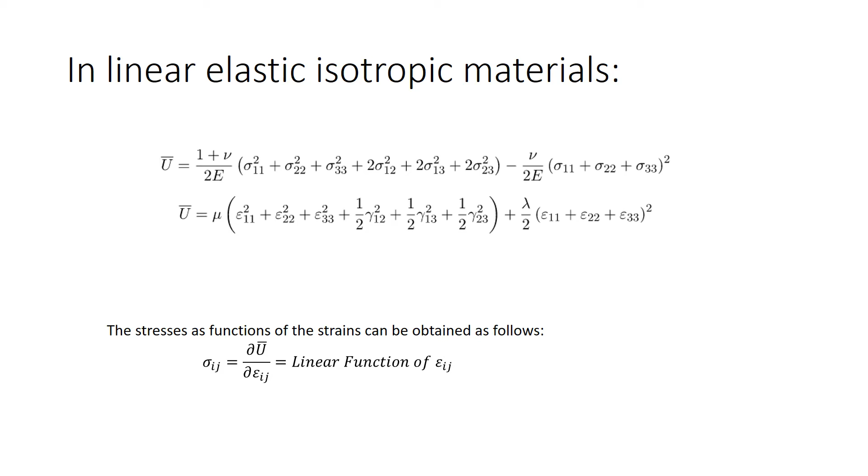I'm going to digress for a moment to talk about path dependence and path independence. In general, if I have a well-defined smooth function, let's say from R squared to R, let's call it u, then the infinitesimal change in u, du, is equal to partial u by partial x multiplied by the infinitesimal dx plus partial u by partial y multiplied by dy.

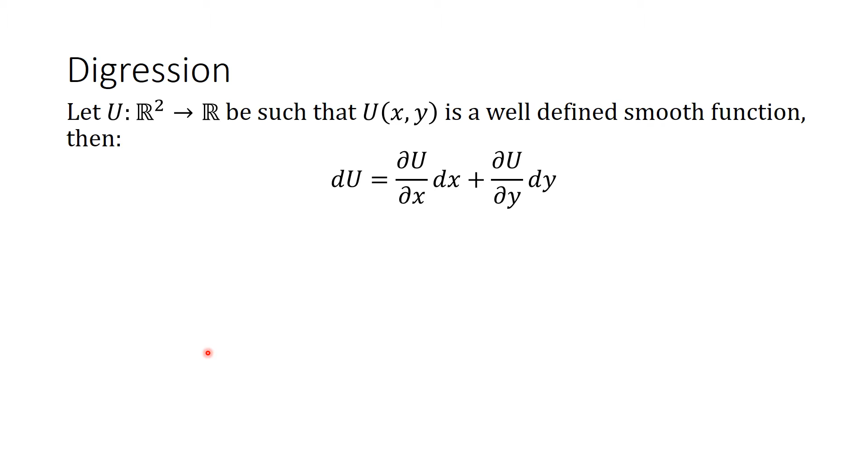The integration over du from point 1, characterized by the values x1, y1, and u1, to point 2, characterized by x2, y2, and u2, is basically equal to u2 minus u1. This is equal to the integration of two terms, partial u by partial x integrated over x and partial u by partial y integrated over y. Since u2 minus u1 is constant, this integration is independent of the path between x1, y1 and x2, y2.

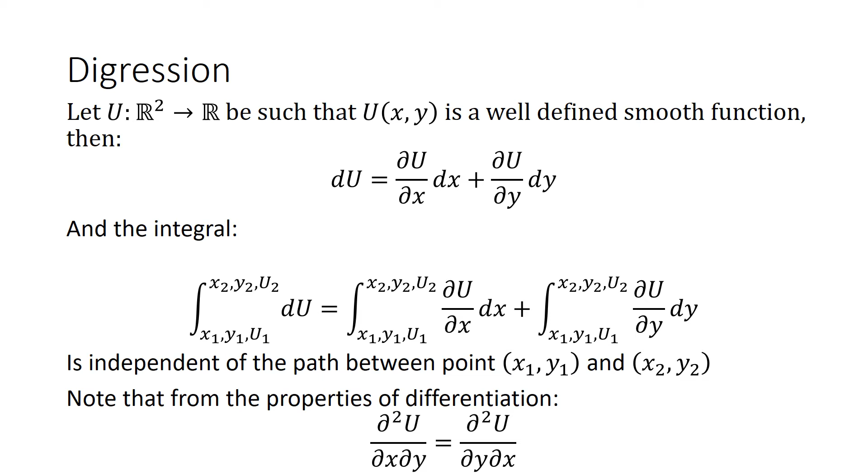And from the properties of differentiation, the second derivative of u with respect to x and y is equal to the second derivative of u with respect to y and x. If we have the differential form, du is equal to a function a of x and y multiplied by dx plus a function b of x and y multiplied by dy, then we have two possible scenarios.

The first scenario is that the expression is called an exact differential, and the integration over du is path independent. That's true if and only if partial a by partial y is equal to partial b by partial x. In that case, there is an explicit form for u that is a function of x and y.

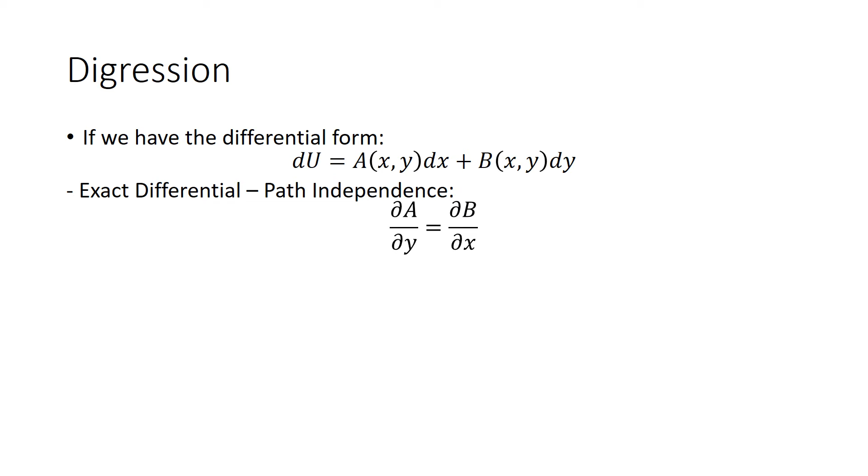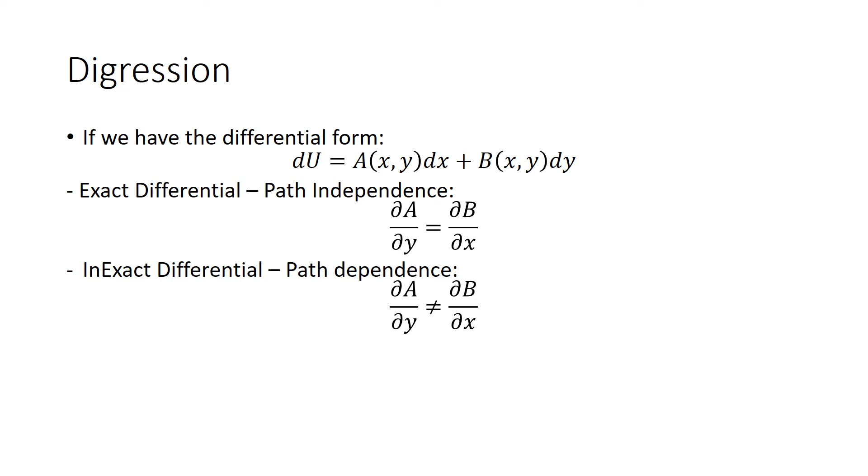The second case, if we have an inexact differential, the integration is not necessarily path independent, and that happens when partial a by partial y is not equal to partial b by partial x. There is an example in the online notes where the energy is not preserved if the relationship between the stress and the strain is not symmetric, where we do not have an exact differential.

So what does this mean exactly? Here we show a schematic representing what we presented in the previous slides. The blue surface represents u as a smooth function of the variables x and y. The value of u2 minus u1 is constant and is equal to the integral along any path between 1 and 2. We've got a green path here and a red path here.

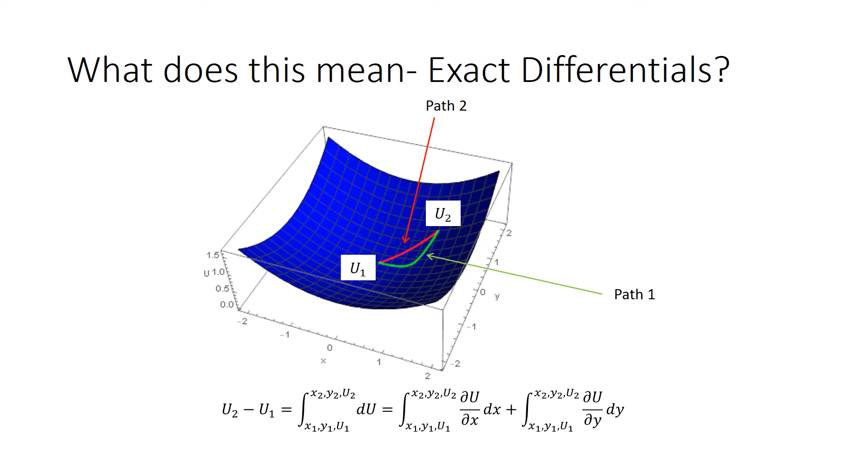So what does this mean in terms of mechanics? Let's see this example. We have an elastic material that does not dissipate any energy during deformation. Let's assume two states of deformation. State 1 with mechanical strain energy density or energy content U1, and state 2 with mechanical strain energy density U2.

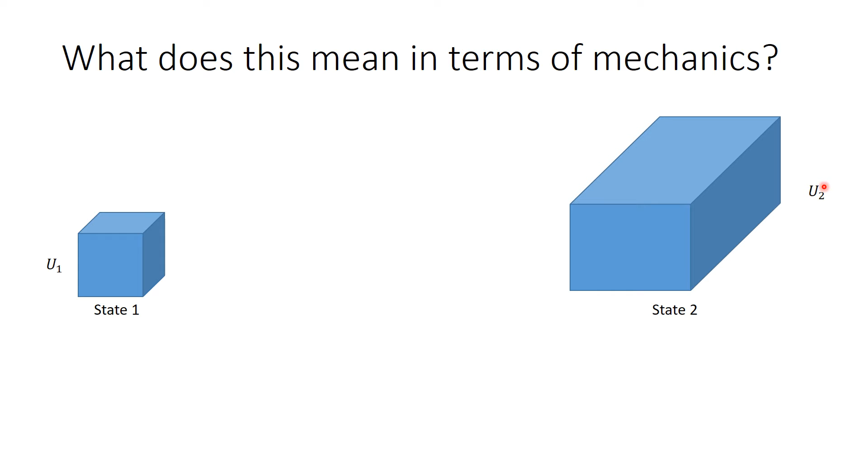We can move from state 1 to state 2 using a particular path. Path 1, in which we choose to apply deformation on one side first and then apply deformation on the other side. Or we can go from state 1 to state 2 using a different path.

Path independence guarantees that the energy U2 minus the energy U1 is the same whether we go through path 1 or path 2. So the energy is independent of the path of deformation.

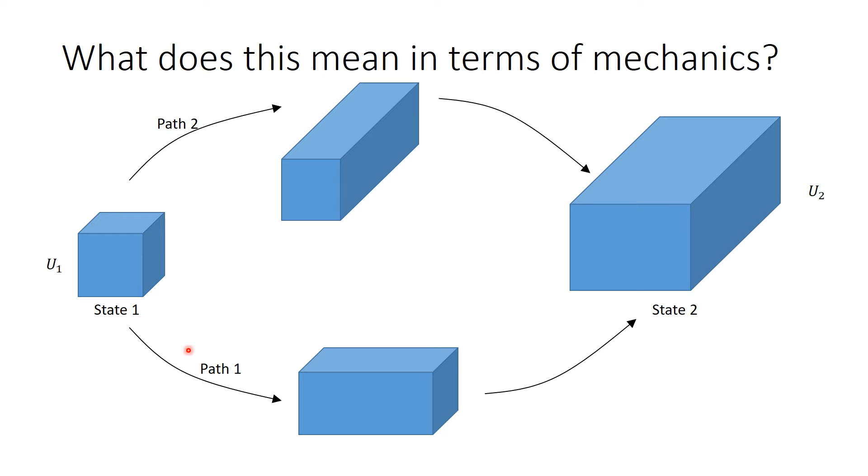So if I have the differential du equal to a dx plus b dy, for u to be independent of the path, a has to be equal to partial u by partial x, and b has to be equal to partial u by partial y.

When I apply this to mechanics, if the increment in the internal energy is equal to each component of the stress multiplied by the component of the strain, for example, sigma 11 delta epsilon 11 plus sigma 22 delta epsilon 22 and so on, then for the energy to be neither created nor dissipated, or to be independent of the path, the energy has to be a well-defined function of the strains, and each component of the stresses has to be equal to the derivative of the energy function with respect to the corresponding strain component.

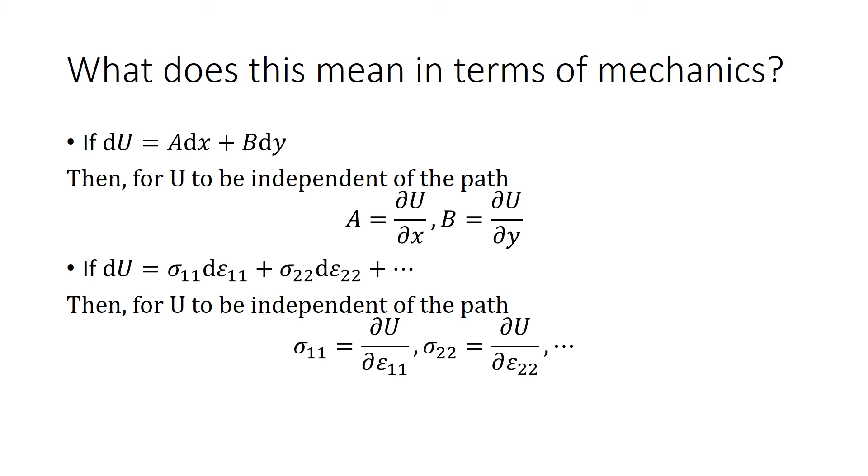In section 9.2.1, we showed that the increment in the strain energy per unit volume in the deformed configuration is equal to the sum over all the components of sigma ij multiplied by the corresponding change in the strain component delta epsilon ij.

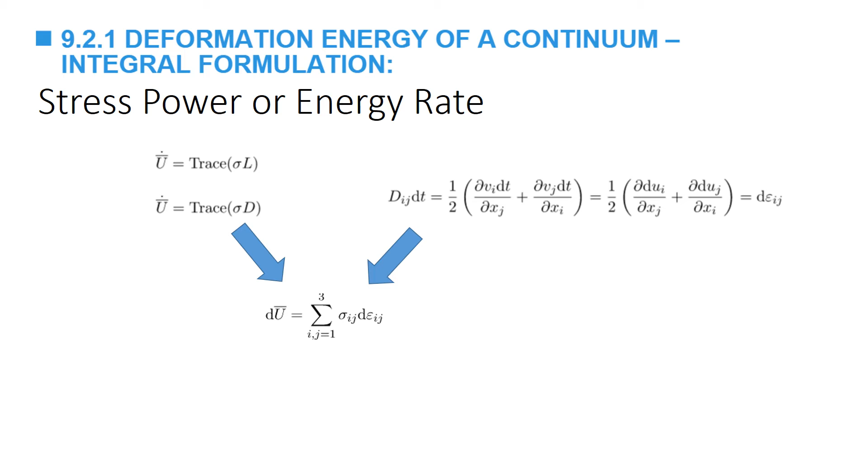We also showed that the increment in the strain energy per unit volume in the reference configuration is equal to the sum over all components of the first Piola-Kirchhoff stress tensor multiplied by the corresponding increment in the deformation gradient Fij. On a side note, remember that the increment dF of the deformation gradient is also equal to the increment in the displacement gradient, which might come in handy in some applications.

So, to describe the material as elastic and the energy to be independent of the path, the components of the first Piola-Kirchhoff stress tensor are equal to the derivative of the function W with respect to the components of the deformation gradient. dW is equal to Pij multiplied by dFij, and Pij's are equal to partial W by partial Fij.

So hyperelastic materials are materials whose constitutive law is described by a strain energy potential function W, and W can be given as a function of the deformation gradient F. In the next few slides, we will investigate the possible forms for such energy function to ensure isotropy and independence of the coordinate system chosen.

First, let's consider the independence on the chosen coordinate system. We will term this independence frame invariance. Given a deformation described by the deformation gradient F, so this is the original or the reference configuration, and this is the deformed configuration, they are related by the deformation gradient F, the strain energy per unit reference configuration is equal to W as a function of F.

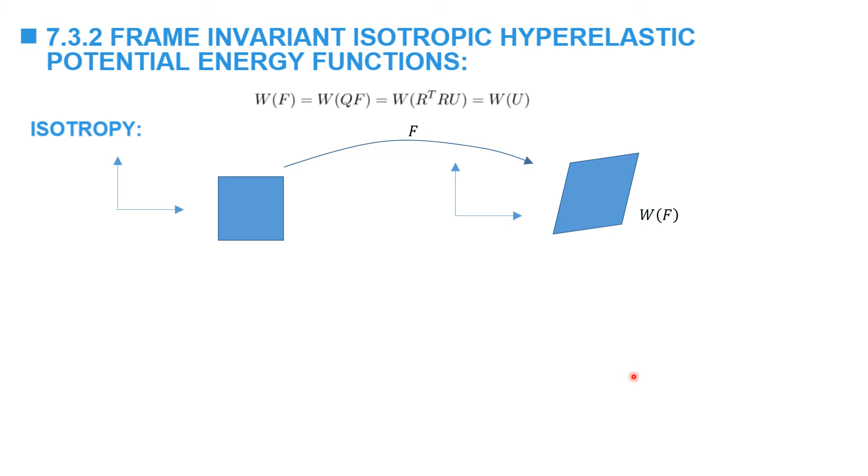It means given a reference configuration, I can apply a deformation gradient F and get a deformation, and the energy is a function of F. If I choose to do a rotation and then apply the same F, then the energy is equal to W of FQ. The reason F and Q are in this order is because I apply Q first on the vectors and then I apply F. And so W is equal to a function of FQ.

You can think of this as rotating the object by Q and then deforming the object by F. If the material is isotropic, then the final energy should be the same whether it's W of F or W of FQ. This leads to the following mathematical statement. For every Q, where Q is a rotation matrix, W of F is equal to W of FQ.

Now recall that F can be written as P multiplied by a diagonal matrix multiplied by Q transpose, where D, the diagonal matrix, has diagonal components lambda 1, lambda 2, lambda 3, which are the principal stretches, or the positive square roots of the eigenvalues of F transpose F. And so this tells me that if I have an isotropic frame invariant hyperelastic material, I can simply write the strain energy as a function of these three numbers.

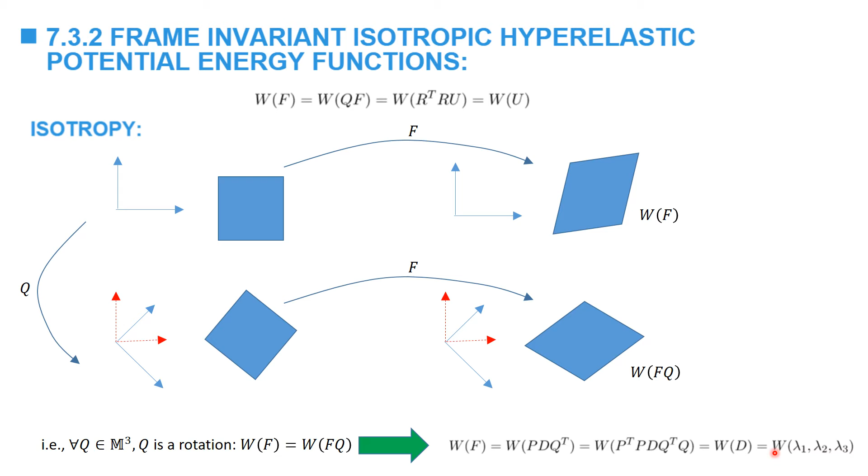It turns out that for any isotropic hyperelastic material, you can write W as a function of the following sets of components: the principal stretches lambda 1, lambda 2, lambda 3; the squares lambda 1 squared, lambda 2 squared, lambda 3 squared; the first, second, and third invariants of U; or the first invariant of U squared, the second invariant of U squared, and J, which is the determinant of F. All these are equivalent, and the proof of this is online.

You can also choose to write the energy as two functions: one with no volume change, and another one associated with volume change. The one that's associated with volume change is a function of the determinant of F, J, while the other term is a function of I1 bar and I2 bar.

I1 bar and I2 bar are the first and second invariants of F bar transpose F bar, and F bar is equal to F after dividing by the cubic root of the determinant of F, and that guarantees the determinant of F bar is equal to 1. So basically normalizing F according to the volume change.

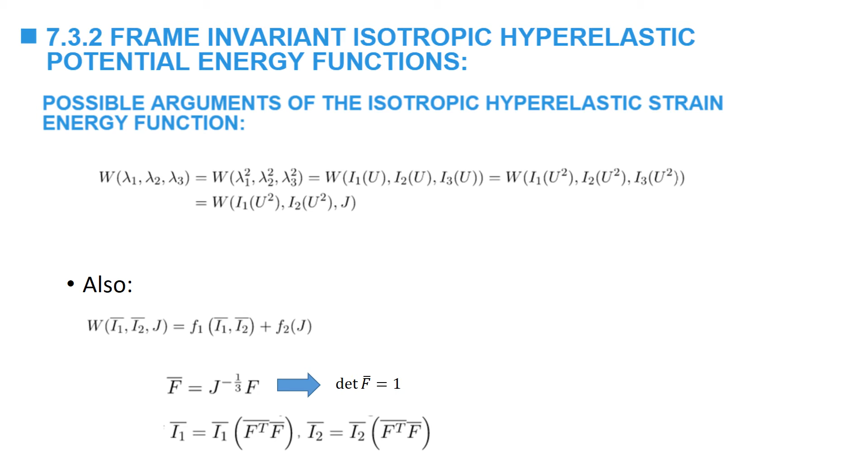Whatever form is chosen, it should in most cases abide by the following. The minimum energy should be attained when the deformation gradient is equal to the identity matrix or to a rotation. The energy should also increase to infinity when the determinant of F is going close to 0 or the determinant of F is going to infinity.

If I bring a material and I squish it, the deformation energy has to increase, and if I expand it infinitely, the energy has to increase as well. Similarly, the energy should increase to infinity when the stretches increase to infinity.

The first form that we are going to present is the form where the energy is written in terms of the first two invariants of C, namely I1 and I2: the first invariant of U squared, which is F transpose F, and the second invariant of U squared, which is the second invariant of F transpose F. J is the determinant of F.

The first Piola-Kirchhoff stress tensor is partial W by partial F. Now I've written W as a function of I1, I2, and J, and so to find partial W by partial F, I need to take the derivative of W with respect to its variables I1, I2, and J, and then multiply by the derivative of these variables with respect to F. So there's a lot of work that we need to do a priori to find these derivatives.

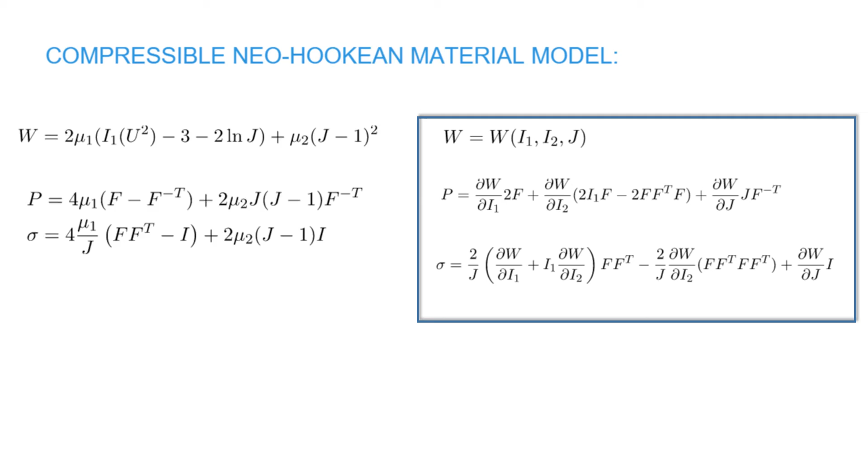Similarly, you have here the compressible neo-Hookean material model, and I will leave the details for this for the students who are interested.

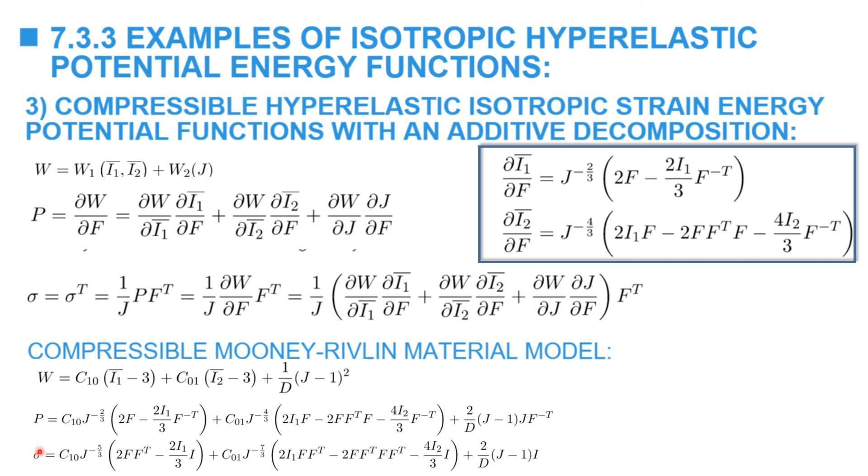And so on. Using this expression, I can quickly find the expression for P, and knowing the relationship between sigma and P, I can find the expression for sigma.

In the following few slides, I will provide a method to provide an estimation for the material parameters of hyperelastic models given their initial linear behavior. Given initial elastic moduli, the shear modulus and the bulk modulus in particular, we will see how we can relate those to these constants that appear in these forms.

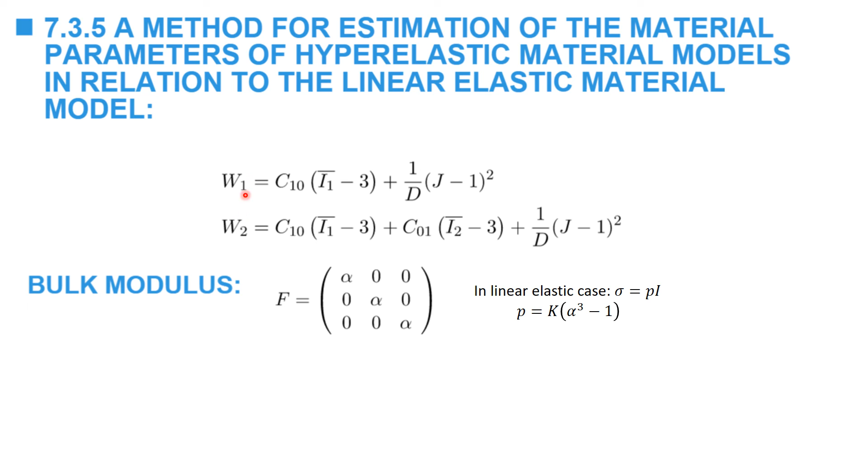And this hydrostatic pressure is equal to K, the bulk modulus, multiplied by the volumetric strain. The volumetric strain is equal to delta V over V, or in large deformations is equal to the determinant of F minus 1. The determinant of F is equal to alpha cubed. If I now use the expressions for sigma as a function of F, F here is given, I've got the two forms, I can find the stress given this F.

Here's the stress for the first expression and the stress for the second expression. Because these two forms separate J from I1 bar and I2 bar, you'll find that the stresses for these two energies are identical. This corresponds to the hydrostatic pressure in the linear elastic case. It is actually a hydrostatic pressure, so 2 over D times alpha cubed minus 1.

When I equate 2 over D times alpha cubed minus 1 to K times alpha cubed minus 1, you see right away that this D constant that appears in these expressions is related to the bulk modulus by the relationship 2 over D is equal to K.

So this served as a very, very brief introduction to hyperelastic materials. There's more information, more mathematical statements, proofs, and examples on the website for those students who need to learn more about hyperelastic materials.